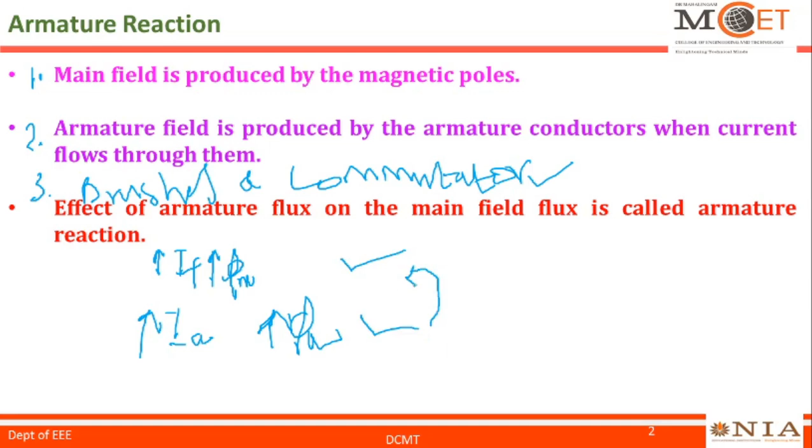So what is all about armature reaction? Armature reaction is nothing but the effect of armature flux on the main flux. So here we talk about two fluxes. One is the main flux, another one is the armature flux. So the effect of armature flux on the main flux, we call it armature reaction.

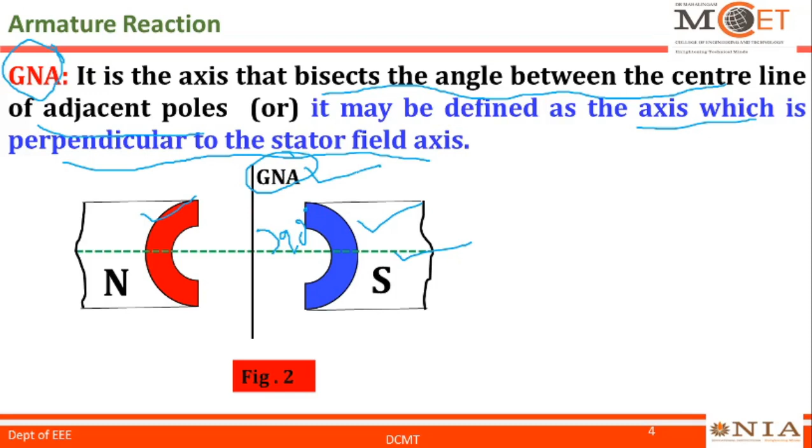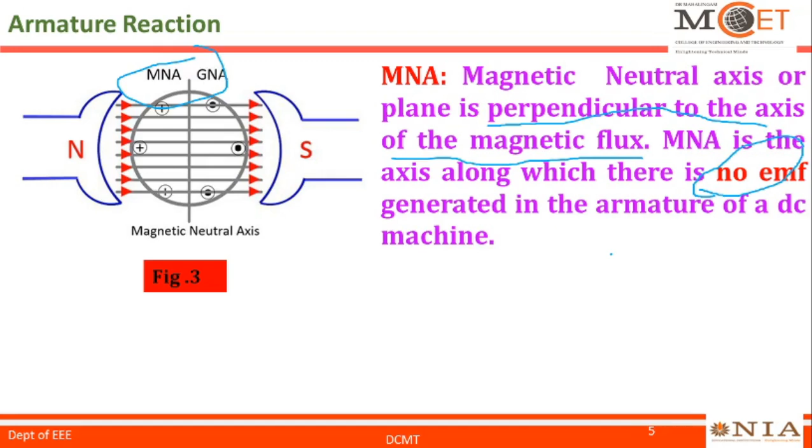And another important aspect of MNA is that it is the axis along which no EMF is generated in the armature of a DC machine. It is a very important point to be remembered. So on the MNA, there is no EMF generated in the armature of a DC machine.

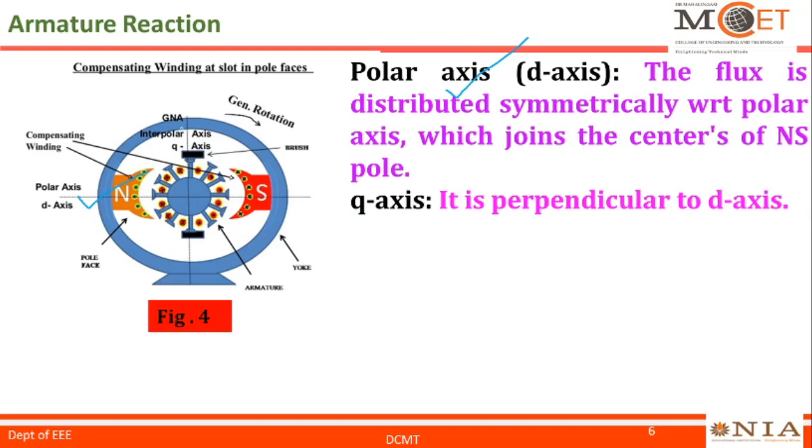The other two axes we refer to as the polar axis, also called the D axis for short, or direct axis. The flux is distributed symmetrically with respect to the polar axis, which joins the centers of the north and south poles. And the Q axis, short for quadrature axis, is perpendicular to the D axis. So naturally it will lie on this axis.

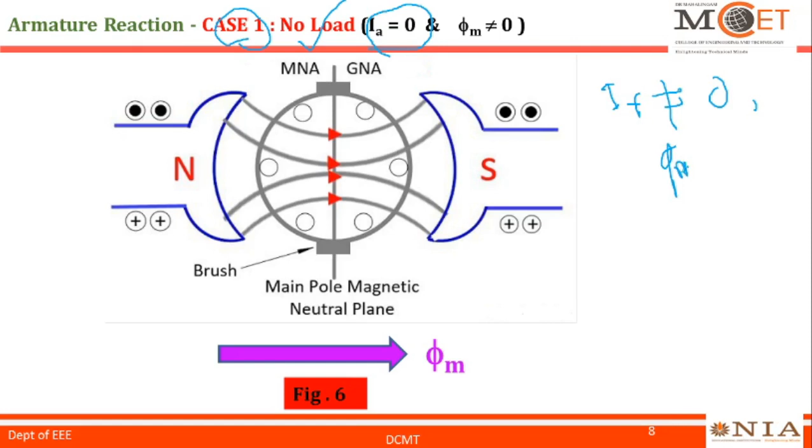Let us discuss armature reaction with the help of three different cases. Let me consider case number one, that is no load. No load means there is no armature current, so armature current is zero. Only the field current is available, that is IF not equal to 0, which leads to phi m not equal to 0. So the field lines are emerging from the north pole and entering the south pole. The lines shown here are only the main field lines or flux lines.

Look at the armature shown in this diagram between the two poles, but there is no armature current. We could represent the field lines as a vector, as discussed earlier, as phi m. This implies the collection of field lines. Since we represent it as a vector, the length of the flux lines depends on the field current. So increasing IF will strengthen the flux. So increasing the field current will increase the main flux phi m.

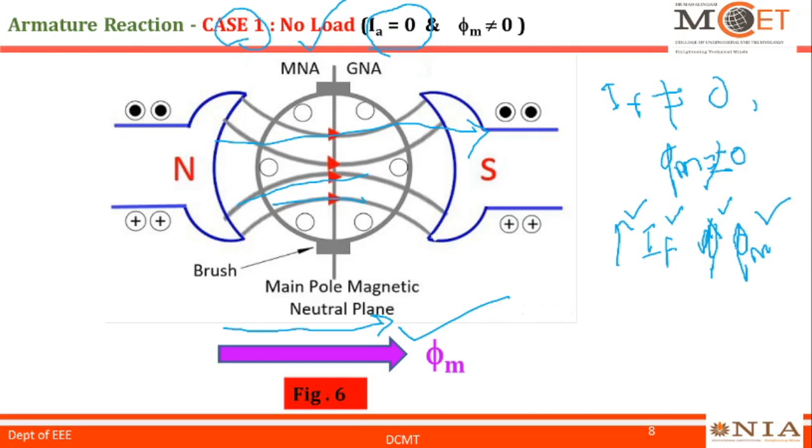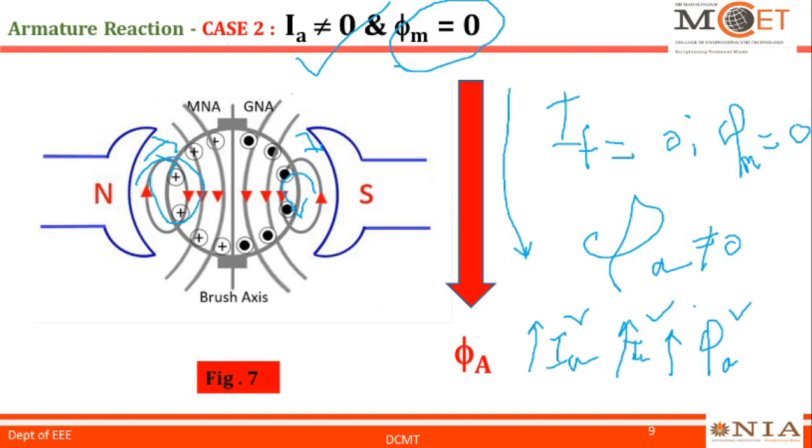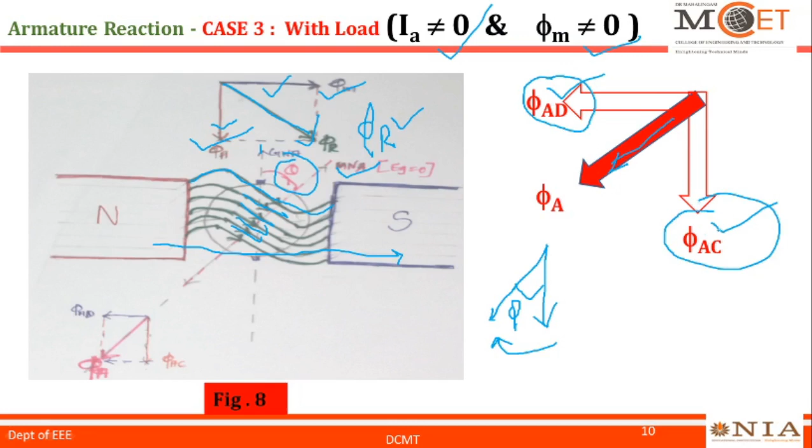So far, we have a main flux from left to right, that is, from North Pole to South Pole, and armature flux acting downward, shown in red, and the resultant flux, shown as phi r. By resolving the armature flux, we get the demagnetizing component and the cross magnetizing component. The demagnetizing component will reduce the EMF generated in the armature, and the cross magnetizing component will distort the main field flux.

How do we solve this, or how do we compensate for this? Look at this diagram. This indicates the main field flux.

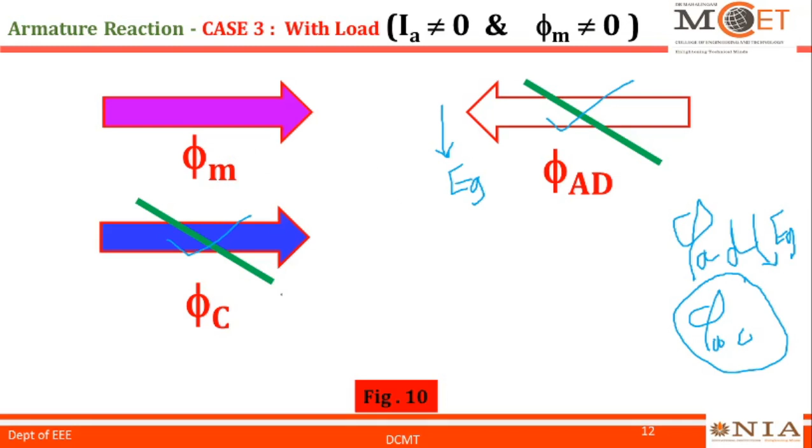This indicates the demagnetizing component, which will decrease the EG. It is not advisable for a generator. So using a compensating winding on the pole faces, I create the compensating flux, which will cancel the demagnetizing component of the armature flux. So these two fluxes, this one and this one, will cancel each other, and the main field flux remains the same. So there is no EG reduction, because these two cancel each other, phi AD and phi C.

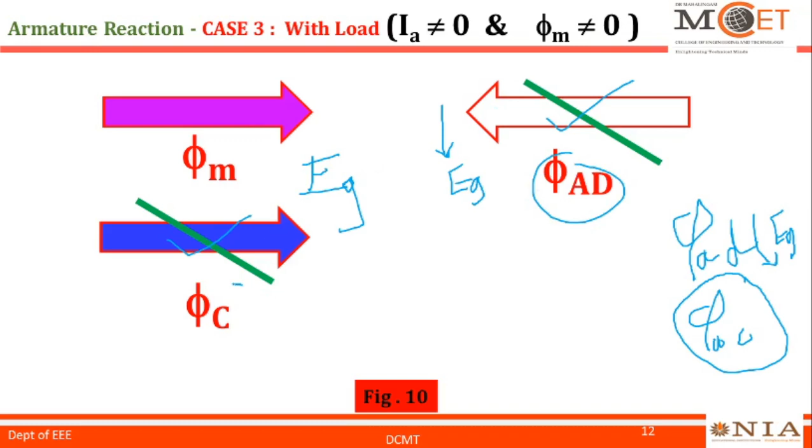So we came to know the effects of armature reaction. There are two main effects. One is that armature reaction weakens the main flux. If the main flux is weakened, that leads to what? The reduction in generated EMF of a DC generator. That is due to what? Phi AD, the demagnetizing component of the armature flux.

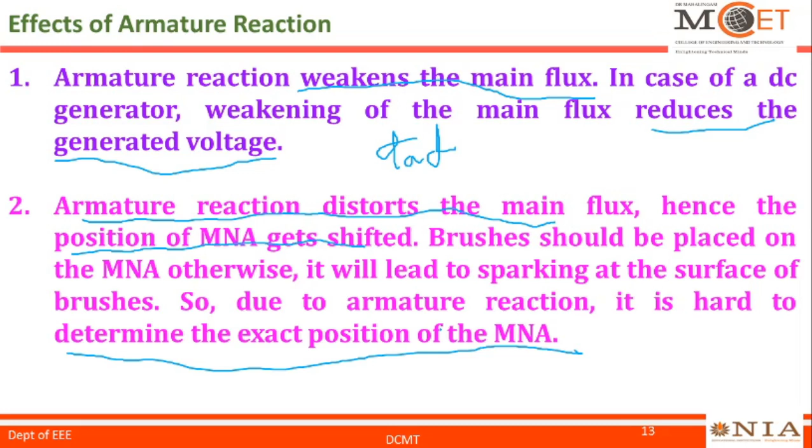And the second one, armature reaction distorts the main flux. That leads to what? The shifting of MNA. That is, the position of MNA gets shifted. Brushes should be placed on the MNA axis, otherwise that leads to sparking at the surface of the brushes. So due to armature reaction, it is hard to determine the exact position of the MNA, because that depends upon the armature flux, which further depends on the armature current, which further depends on the load current, and the load current is not constant, it keeps on varying. So the brush positions keep on changing.

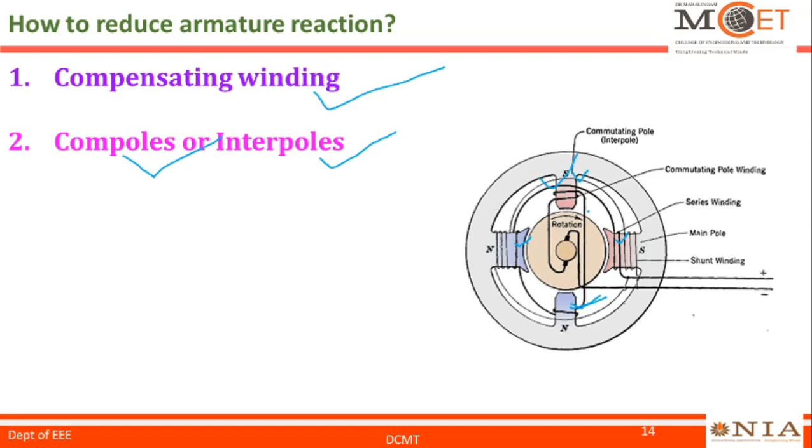How do we overcome these problems? We could reduce or mitigate the effect of armature reaction with the help of compensating winding and also commutating poles, shortly called compoles. Another name for compoles is interpoles. The compensating winding, which you can see on the pole faces of the main poles here, is in close proximity to the armature winding and in series with the armature winding. And these two are interpoles, north and south interpoles, lying in the interpolar region, that is, midway between the main poles north and south. These small poles are called interpoles. The compensating winding is connected in series with the armature winding.

Armature conductors coming under the main pole region produce an MMF which is 90 degrees to the main field. This leads to distortion of the main field flux. This is known as the cross magnetizing effect. In order to minimize the cross magnetizing effect, we use the compensating winding, and it produces an MMF which opposes the MMF produced by the armature conductors. The cross magnetizing effect causes sparking at the commutators and short circuiting of the armature winding. We reduce this effect with the help of a compensating winding connected in series with the armature winding.

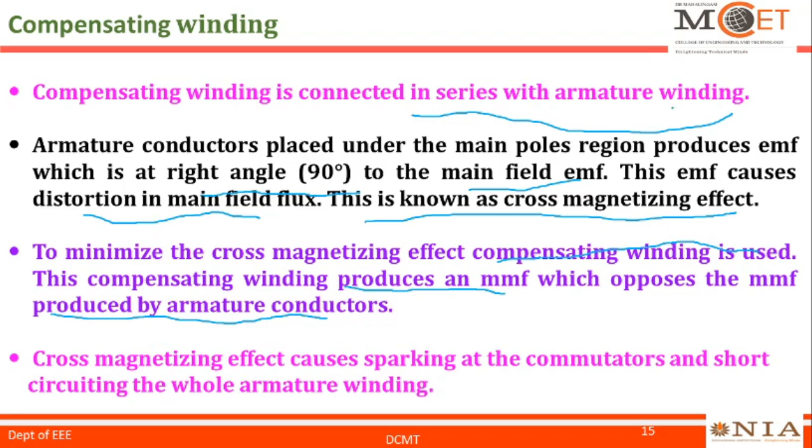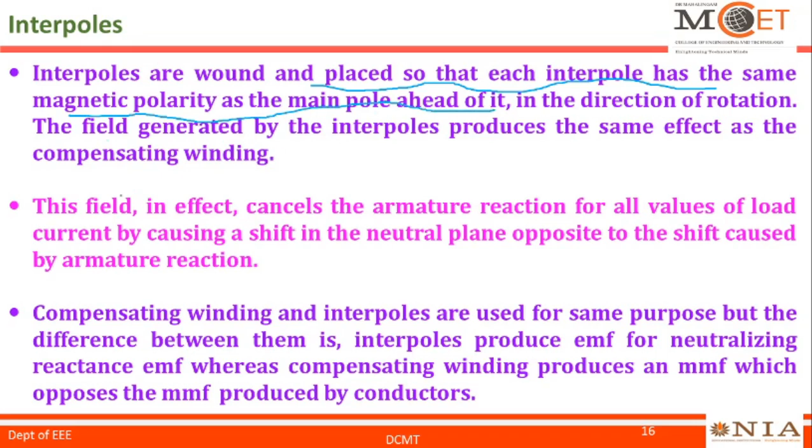And the interpole we have seen in the previous diagram is placed in the interpolar region and has the same magnetic polarity as the main pole ahead of it in the direction of rotation. The field generated by the interpoles produces the same effect as the compensating winding. This field in effect cancels the armature reaction for all values of load current, because armature reaction is the effect of armature flux on the main flux, and the armature flux depends upon the armature current, which further depends on the load current. The load is not constant, it is varying. So this field cancels the armature reaction for all values of load current, causing a shift in the neutral plane opposite to the shift caused by the armature reaction.

So the armature reaction shifts the MNA axis, and the field produced by the interpole shifts the MNA axis in the opposite direction. Meaning what? We are not allowing the MNA axis to shift. Compensating winding and interpoles are used for the same purpose, but the difference is that interpoles produce EMF for neutralizing reactance EMF, whereas the compensating winding produces MMF which opposes the MMF produced by the conductors. So the interpole produces EMF and the compensating winding produces MMF.

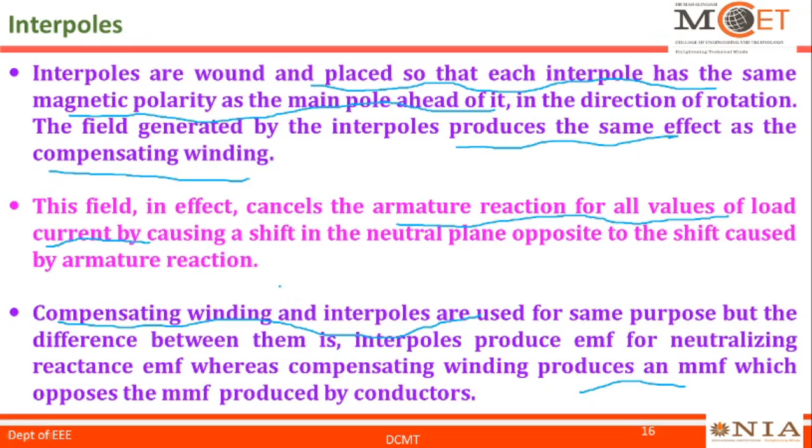So far we discussed armature reaction and its effects. To be more specific, we talked about, number one, armature reaction, and the important aspects of what GNA is, what MNA is, and the D axis and Q axis. We talked about the effects of armature reaction, what will happen due to armature reaction, and we discussed how to decrease or mitigate the effect of armature reaction. In the next class, we will be talking about commutation and its types.